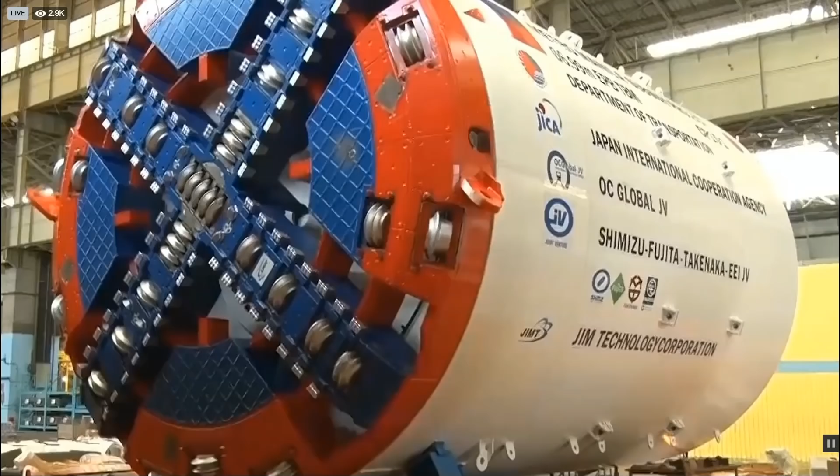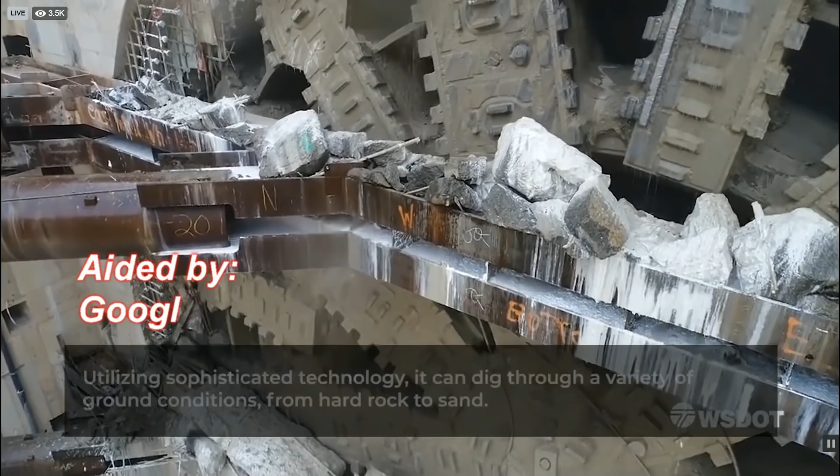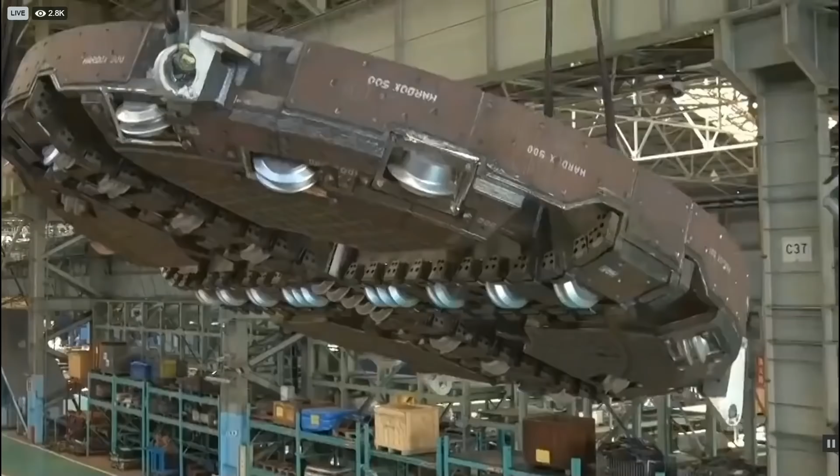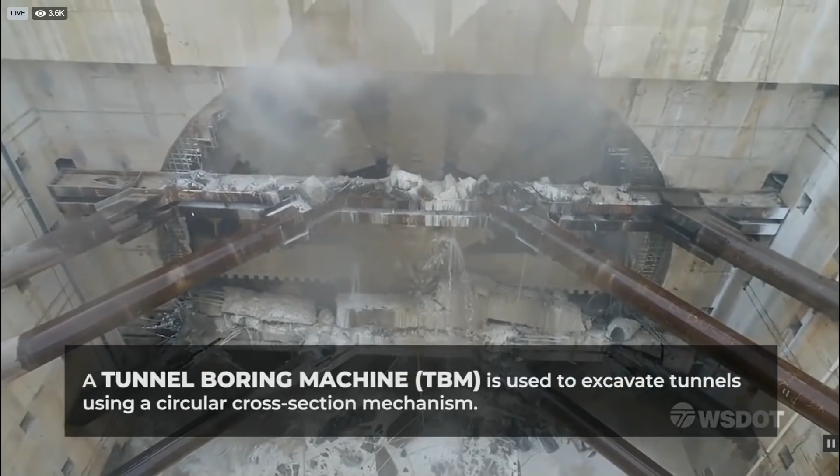You may have seen many videos about the Metro Manila subway, including a social media virtual tour where we saw the factory where they make the tunnel boring machine. This video will show you how this gigantic tunnel is going to be made for the Metro Manila subway.

A subway tunnel is a very big hole made by digging underground to build a railway underground where the train will pass through, in what is called a subway. In order to make this tunnel, we need a machine that will dig this gigantic hole deep underground. This machine is called the tunnel boring machine, a very big and gigantic drilling machine.

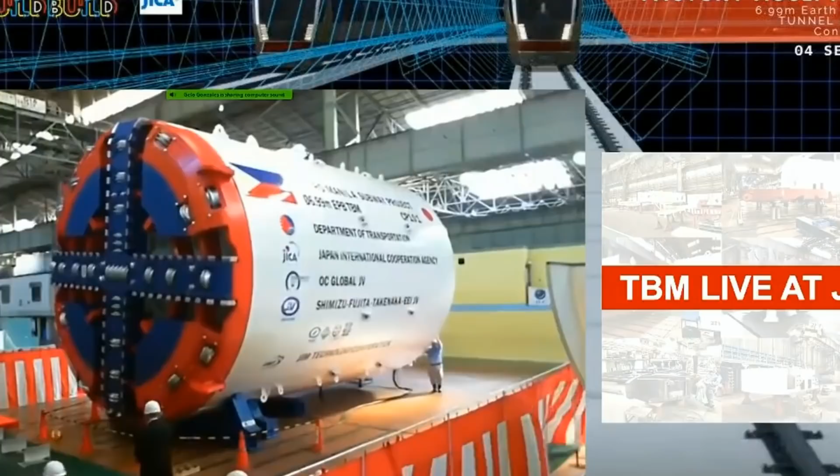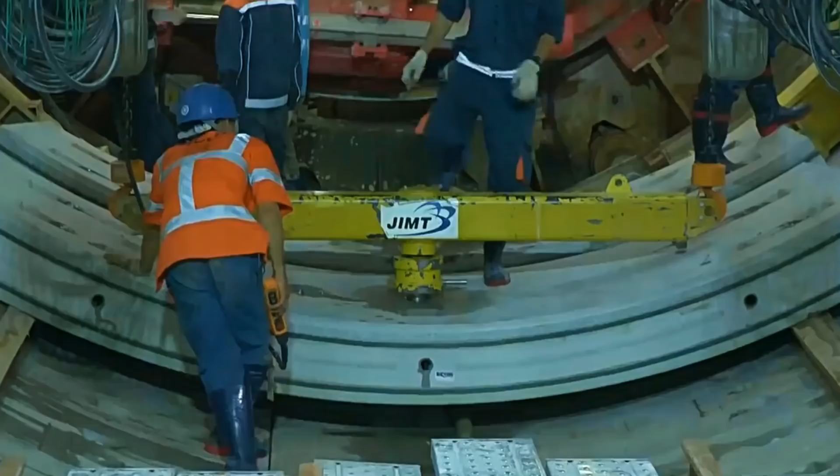One of the most important components of the tunnel boring machine is the cutter head, which will drill this gigantic hole underground no matter how hard it may be. A tunnel boring machine has many gigantic components, and it is inside the tunnel boring machine where people will work to make this subway tunnel. Now let us see how this tunnel and subway is actually going to be made for the Metro Manila subway.

Before we begin, let us have a little history lesson of some of the modern railway systems in the world. September 1973, the proposal to build the first subway in Metro Manila was conceived in a study conducted by JICA's predecessor, the Japan Overseas Technical Cooperation Agency, or OTCA.

After nearly half a century and 6 administrations from the 1973 OTCA study, under the strong-willed leadership of President Rodrigo Roa Duterte and Secretary Arthur P. Tugade, it is now Manila's turn. It is now the Philippines' turn to finally build our first ever subway using, for the first time, not just one but a fleet of 25 railway tunnel boring machines, or TBMs.

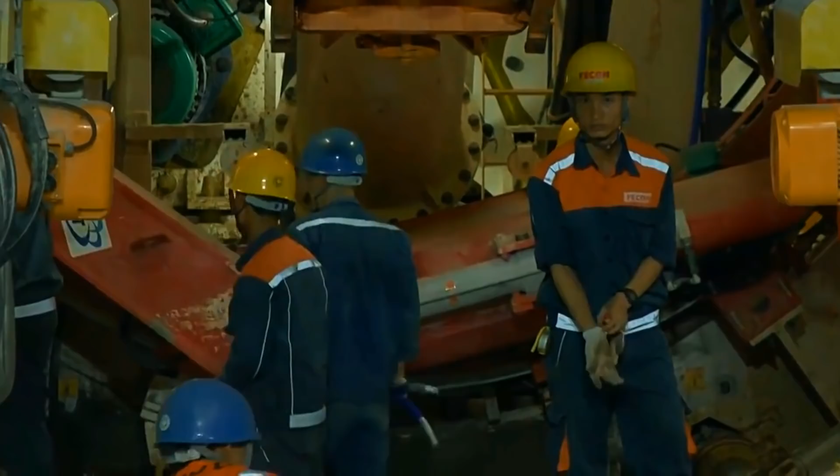Each of these gigantic machines can lay down up to 12 meters of tunnel segments per day and excavate daily up to 600 cubic meters of soil.

The 33-kilometer Metro Manila Subway Project, with its 17 stations from Valenzuela to NAIA Terminal 3 and FTI, is expected to excavate approximately 7.7 million cubic meters of soil, or the equivalent of 3,100 Olympic-sized swimming pools.

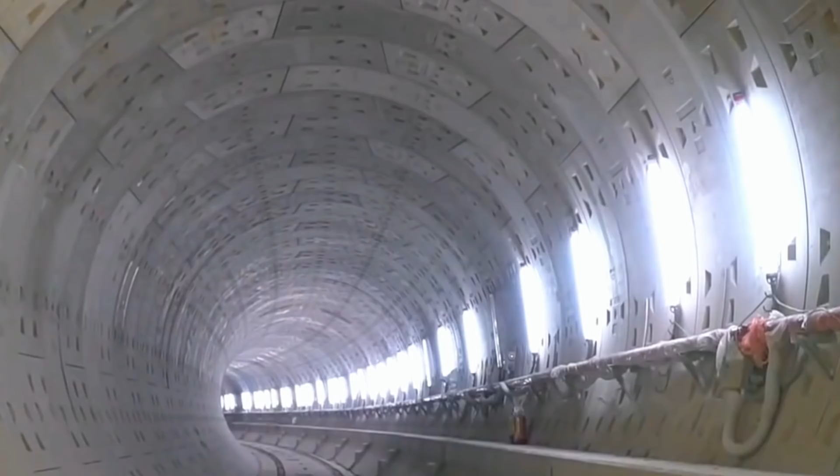A tunnel boring machine's sheer size and power will not only contribute to faster tunneling and project completion, but will also significantly reduce disruption above ground during construction.

Our first completed TBM is scheduled to arrive in the Philippines by the end of January 2021, with the second TBM following shortly after in February 2021.

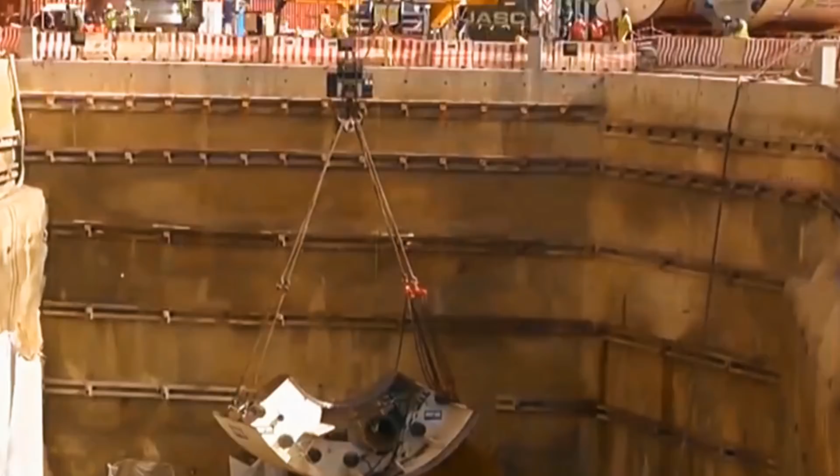For the partial operability section of the Metro Manila Subway from Barangay Ugong in Valenzuela City to North Avenue in Quezon City, the first part is to start digging at the first station of the Metro Manila Subway line, which in this case is in Barangay Ugong in the Valenzuela Subway Station.

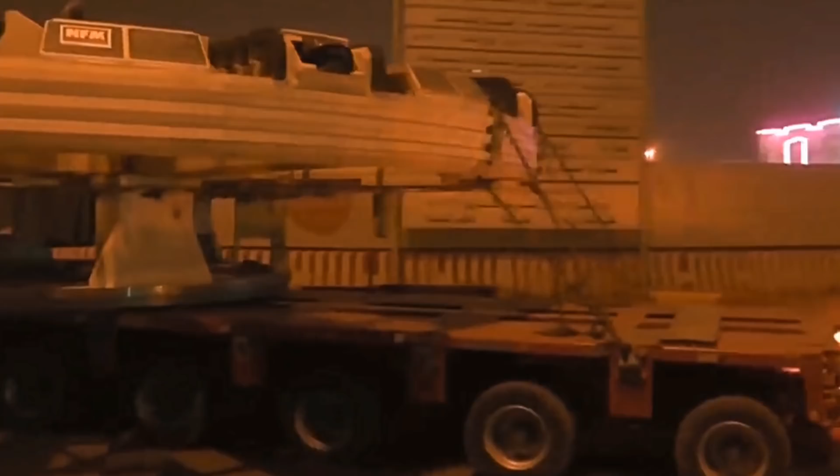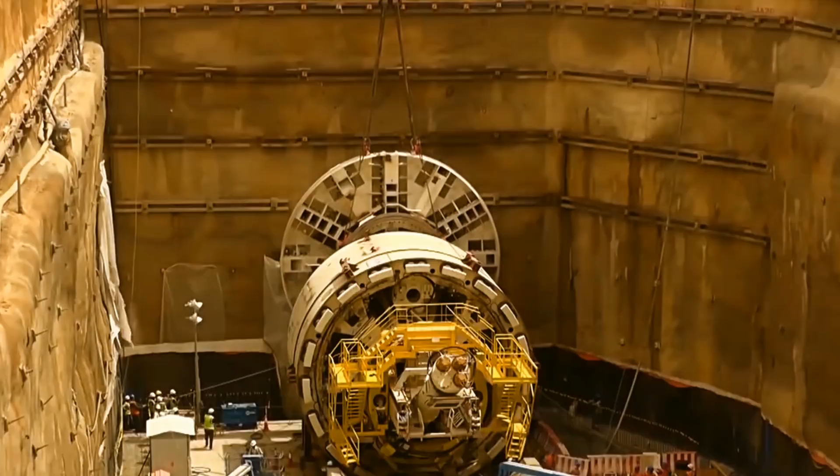All the parts of the tunnel boring machine will have to be transported to the Valenzuela Subway Station site location in Valenzuela City. Then all the parts will be lowered down and assembled at the designated tunnel site. This is an illustration of how the tunnel excavation is going to be made.

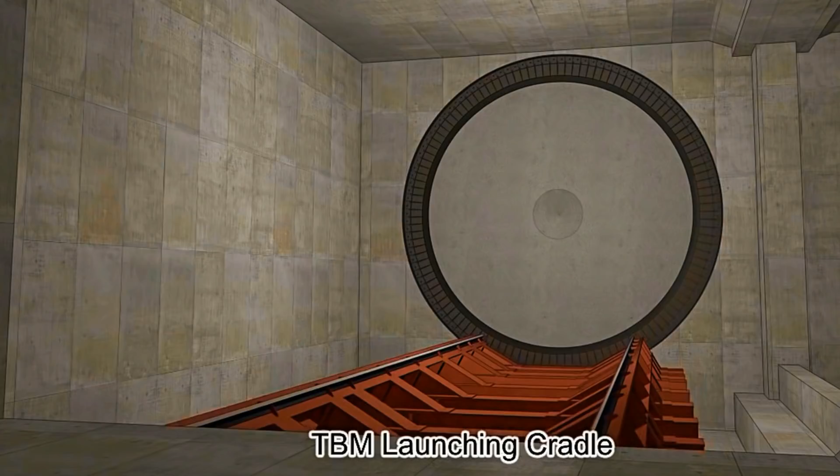First, the launching cradle of the TBM will be placed at the designated entry point of the subway tunnel. Then all the parts of the tunnel boring machine will be assembled on the launching cradle.

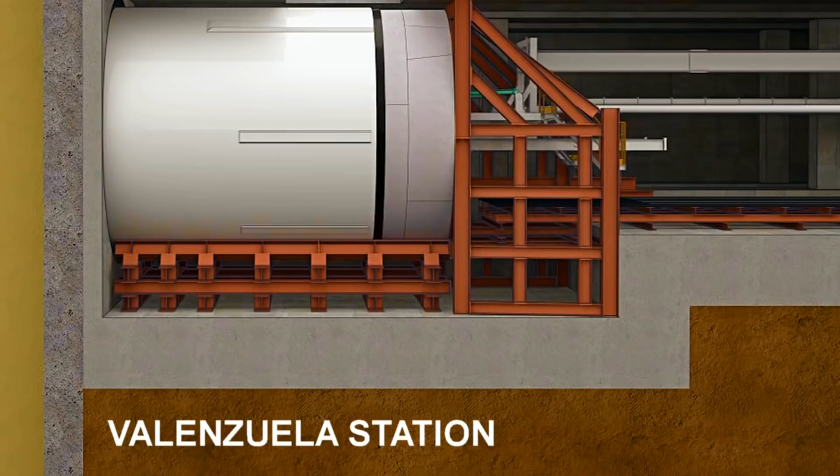The TBM will then start digging the tunnel from the Valenzuela station.

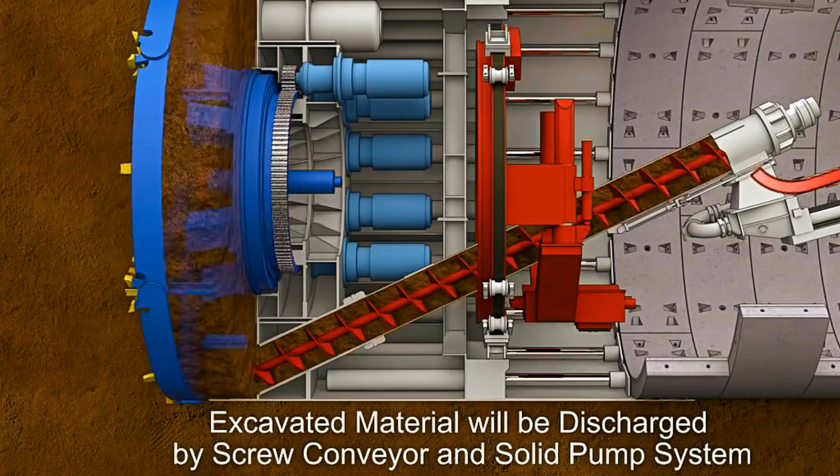The excavated soil will be passed on through a conveyor and solid pump system. At the back receiving end of the tunnel boring machine, the excavated soil will be received and transported out of the tunnel excavation site.

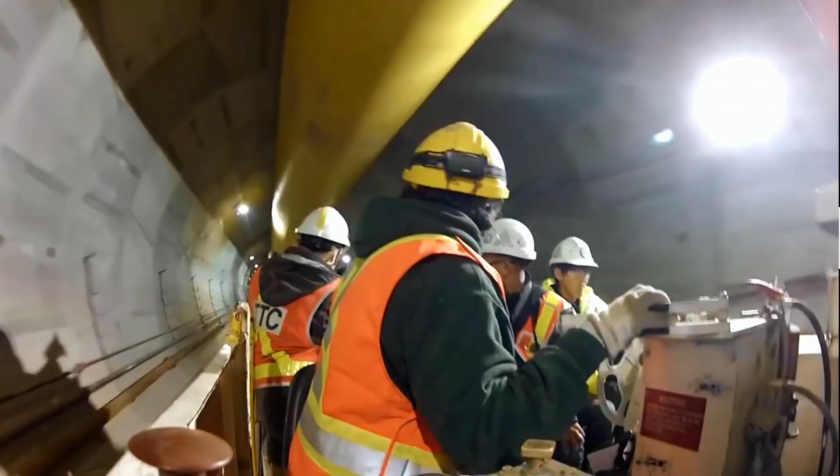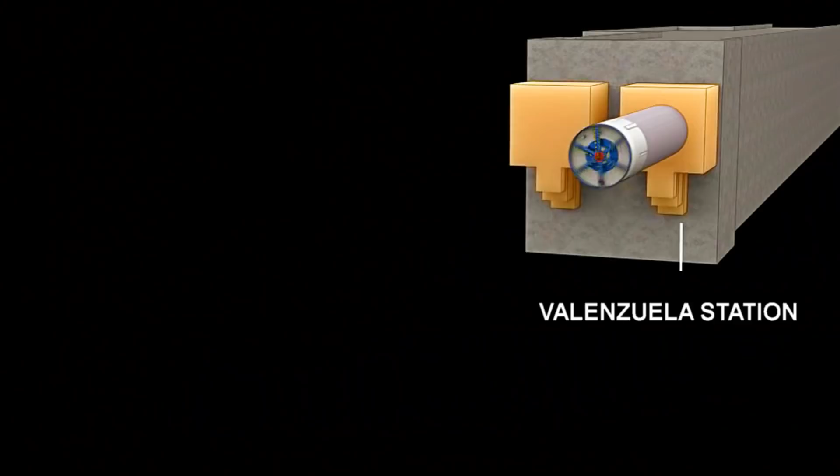On and around the tunnel, where the tunnel boring machine will be digging, a tunnel ring will almost at the same time be made in a ring building process. This tunnel ring will be the actual tunnel structure constructed in the tunnel ring building process. This process will all be automated by the tunnel boring machine.

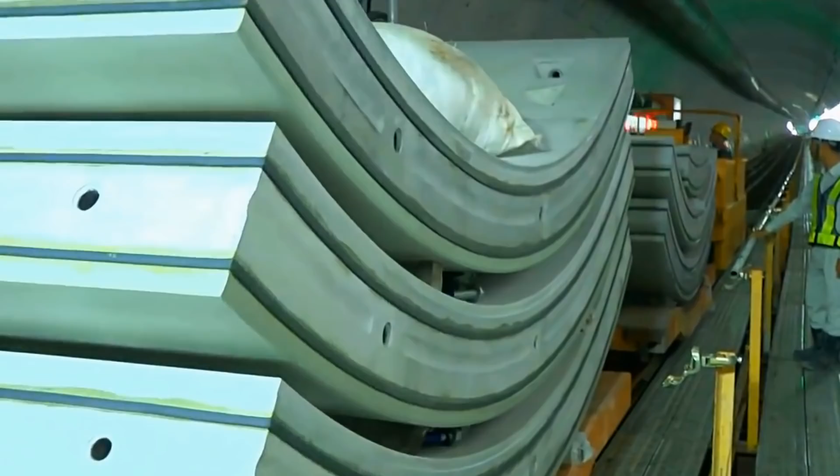The prefabricated segment pieces of the tunnel ring will be transported inside the portions of the completed tunnel and brought through the back end of the tunnel boring machine.

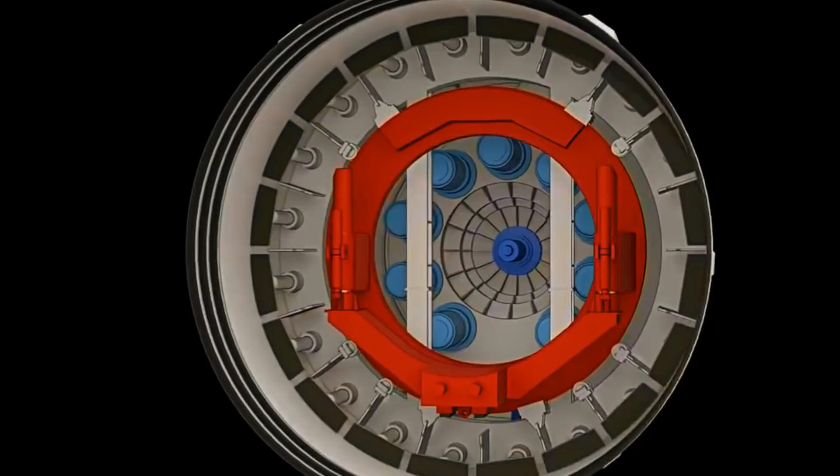The segment pieces will be laid out around the tunnel, which the tunnel boring machine has already finished digging, with the help of tunnel construction workers and engineers.

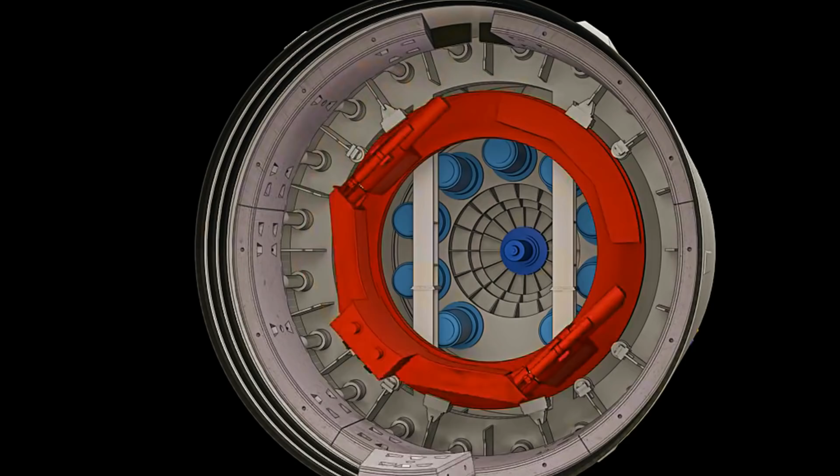The actual tunnel building process is shown here in the actual construction of the tunnel subway of the Ho Chi Minh City Metro of Vietnam.

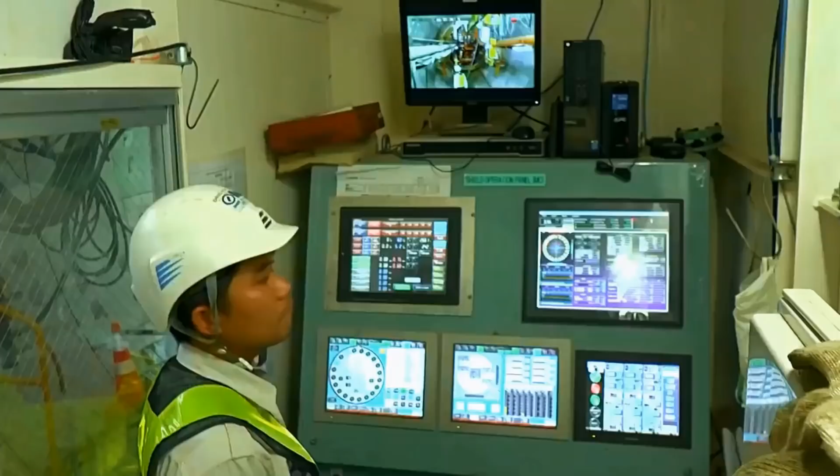The whole process will be computerized and controlled in the control room of the tunnel boring machine.

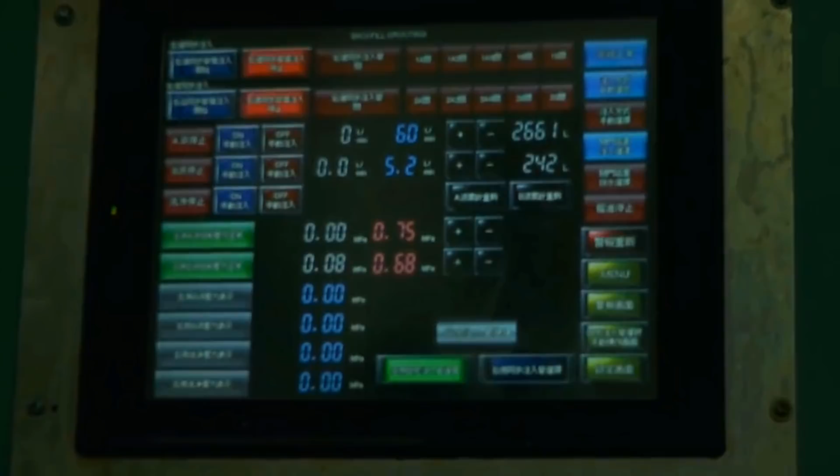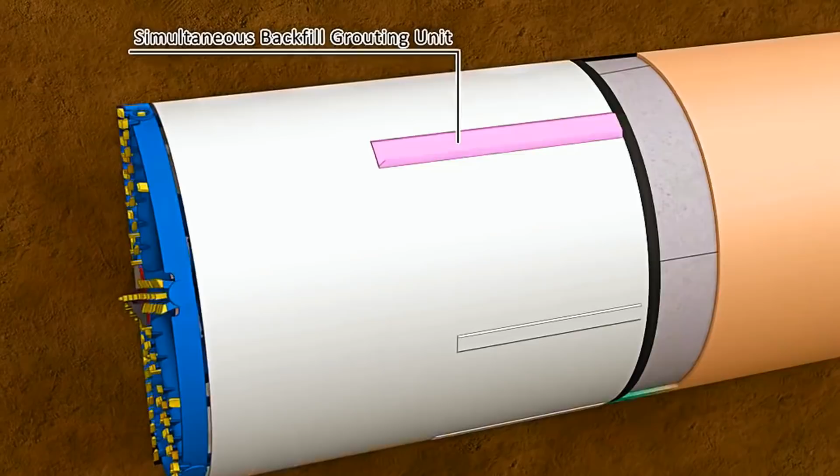In and around the edges of the tunnel ring will be filled with grout by the backfill grouting unit of the tunnel boring machine. A grout is some sort of a paste for filling gaps between the wall and wall tiles, which in this case is the prefabricated ring segment pieces of what will be the subway tunnel.

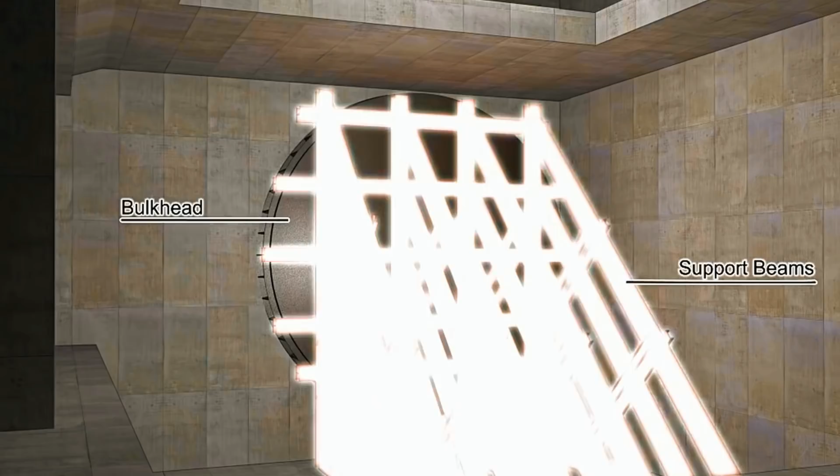At the ultimate end of the tunnel, which in this case would be the North Avenue station, construction would have already started, even before the tunnel boring machine has finished digging the tunnel.